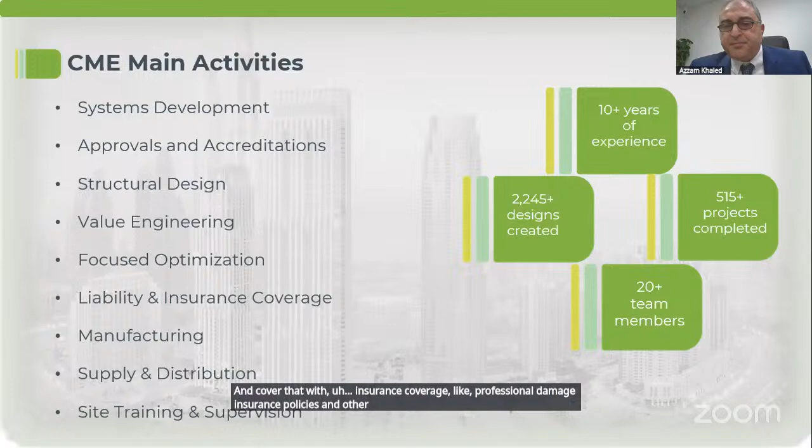Okay, as I mentioned, the main services would include either supply of materials. Let's stick with this slide. So these are the main products or systems that we are doing now.

EVOS, the voided slabs, and the voided slab technology is about 30 years old, maybe a little bit more. It started in North Europe about 30 years ago with a system called Bubble Deck, then moved to another company called Cobiax. EVOS is our own system, approved by the International Code Council (ICC) and many local authorities in the region, including local authorities in UAE like Dubai Municipality.

EVOS, like void formers in general, is about creating voids inside the slabs where concrete doesn't work or doesn't help much handling the loads. E-tension is the regular post-tensioning system, as you all know. And E-fill is the voided filling system, and it is about replacing typical or traditional filling materials, volume or solid materials such as lightweight concrete, with voided filling.

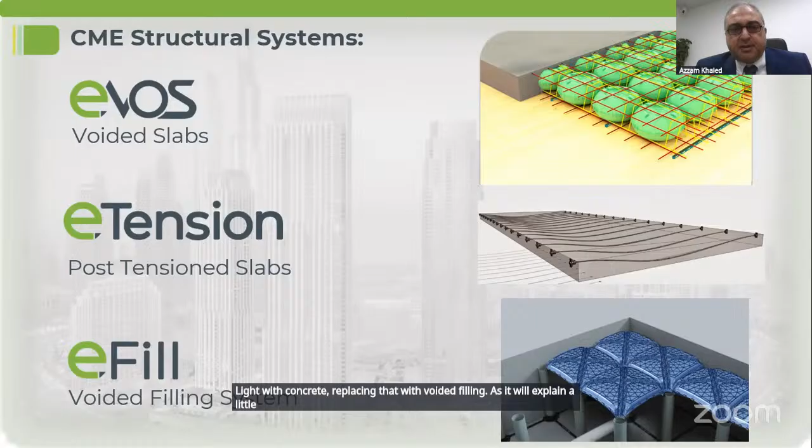So this is the concept of creating voids inside the slabs. As I said, as you all know, between tension and compression, concrete doesn't help much. Under the neutral axis line, it doesn't help much to handle the load. So it's a very old concept taught in universities, about whether it was possible to save this concrete while still keeping the thickness of the slab.

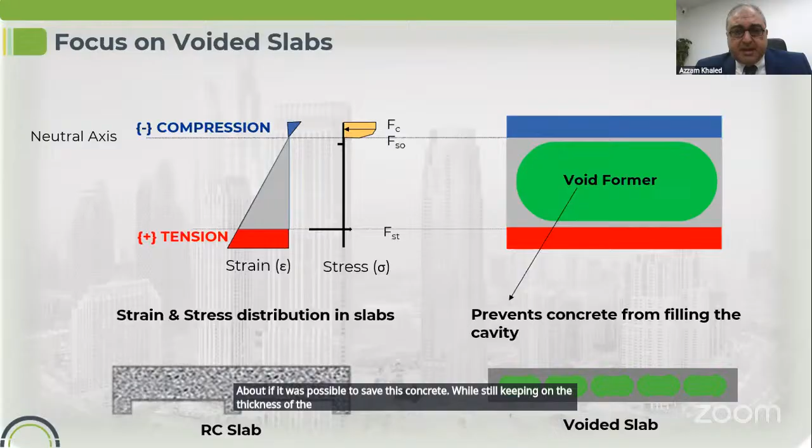Engineer Ahmed will talk a little bit more about this, but as you can see, void creators or void formers are distributed in the slab, avoiding shear areas around columns and edges and openings or stuff like that. In this section, as you can see at the bottom, we have normal steel as in any solid slab, and we have chairs as in any solid flat slab. The only difference is that in some cases in the slab, we have void creators.

These voided slab thicknesses can vary between, let's say, 180 mm to 725 mm. And the covered area could be between 30 to 80% of the total slab area.

It's about, if we say a traditional solution is a solid slab with drop beams or panels, compared with EVOS, the voided slab. In most cases, not less than 90% of cases, slabs would have flat soffits. Almost the same thing with the post-tensioning. With hybrid voided post-tensioning slab, the same thing.

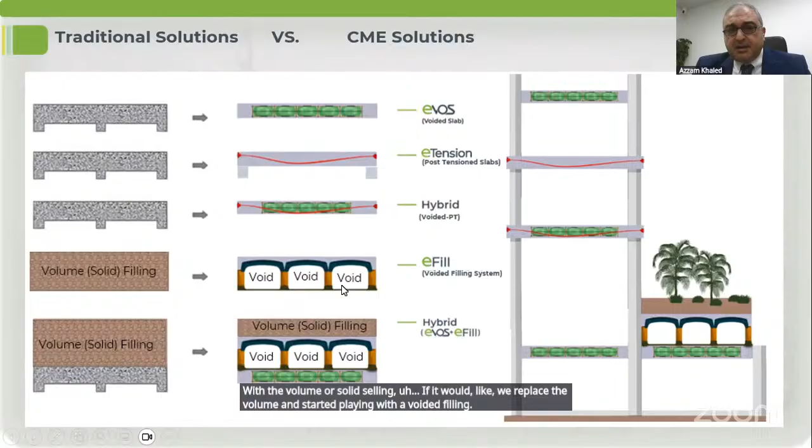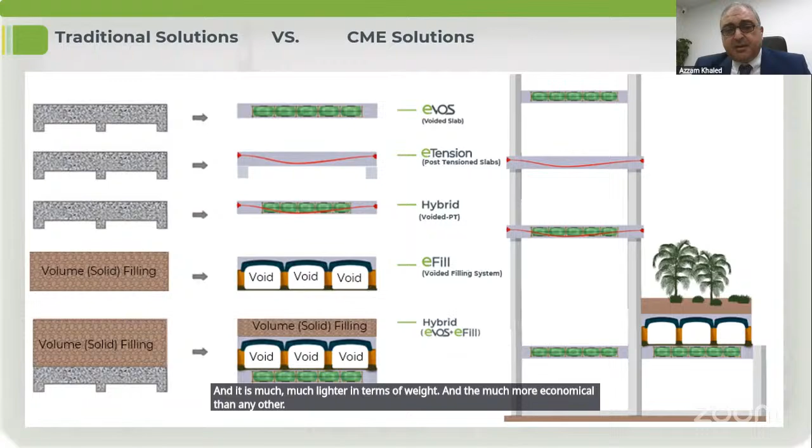And as I explained, with the volume or solid filling, we replace it with a voided filling. Between the columns, the plastic columns or pipes, there is a void, and then these plastic pipes we fill with concrete and steel, so they work as reinforced concrete columns. On top we put again concrete and steel mesh, so it works as the reinforced concrete slab. In general, voided filling structure is like a mini reinforced concrete structure instead of this volume or solid filling, and it is much lighter in terms of weight and much more economical than any other solid or volume filling system, and faster, of course.

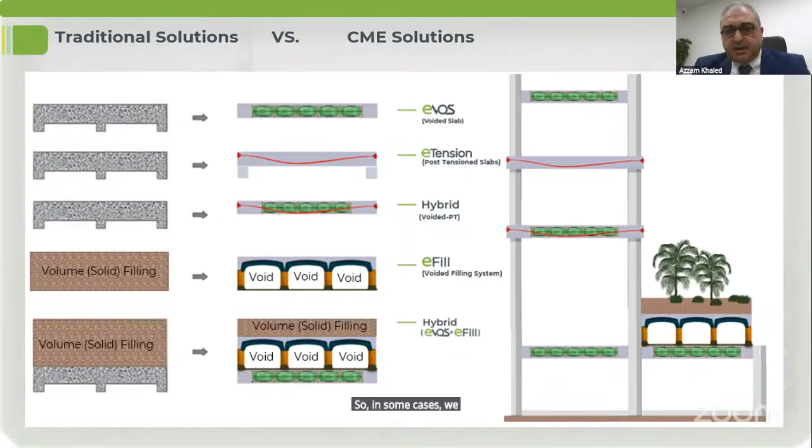So in some cases, we use also hybrid here. Again, Engineer Ahmed will talk about this next.

If we go back to EVOS, to the voided slabs, a small comparison, many people mix between voided slabs and ribbed slabs. In ribbed slabs, we use lightweight bricks or lightweight blocks, or even waffle or polystyrene, or any material, for the same purpose, which is reaching the area where concrete doesn't work, and replacing that concrete with the waffle or lightweight block, making the slab lighter and cheaper.

But unfortunately, with the ribs, when we do that, we sacrifice the bottom cover, like we sacrifice the continuity of the bottom steel and the continuity of the bottom concrete, and thus we create a T-section.

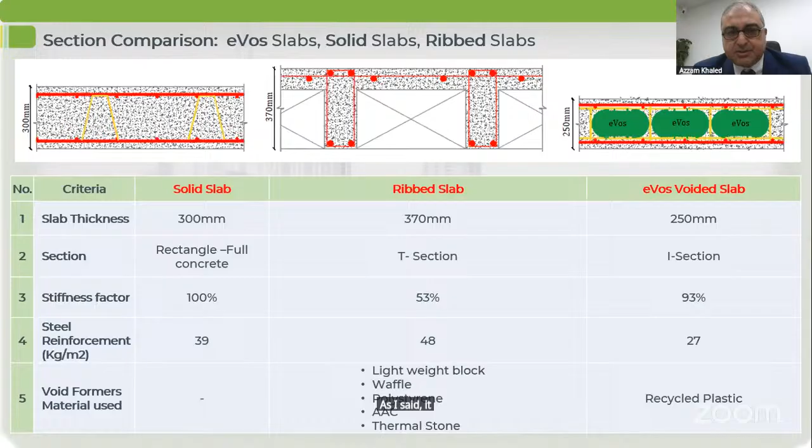And we need, of course, to use lots of steel quantities in the ribs, while in the voided slabs, similar to post-tension slabs, slab thickness goes down to 250, 240, or 260, something like that. And as I said, it does the I-section.

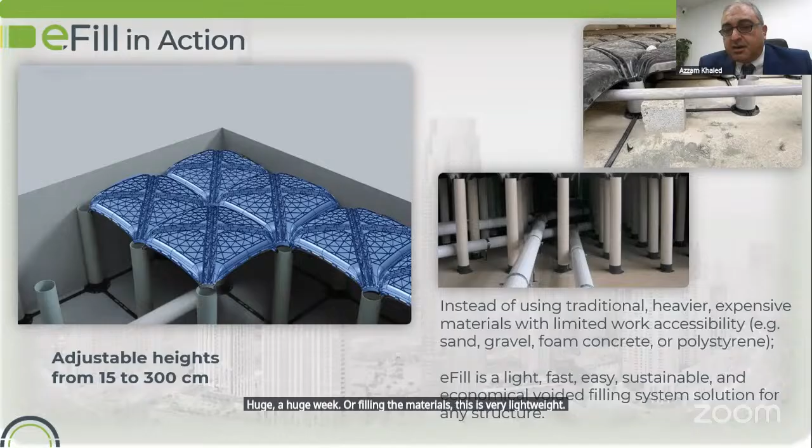This is the structural section of the eFill. The green color shows the plastic elements, which are, I would say, dead shutters—they stay there forever and lose their value immediately after concreting.

The red or brown color shows the steel reinforcement, and how the inverted U-bars go inside the pipe and are hung on the horizontal steel mesh. And of course, as you can see, it is all concreted.

Now, the height of this section or system, with the same system, could be between 15 to 300 centimeters—between 0.15 to 3 meters.

And of course, it's very important to mention that this has to be designed depending on the applied loads and the nature of the applied load, whether static or dynamic, whether we have cars, trucks, or fire engines going on top, or it's just used in landscape or elsewhere.

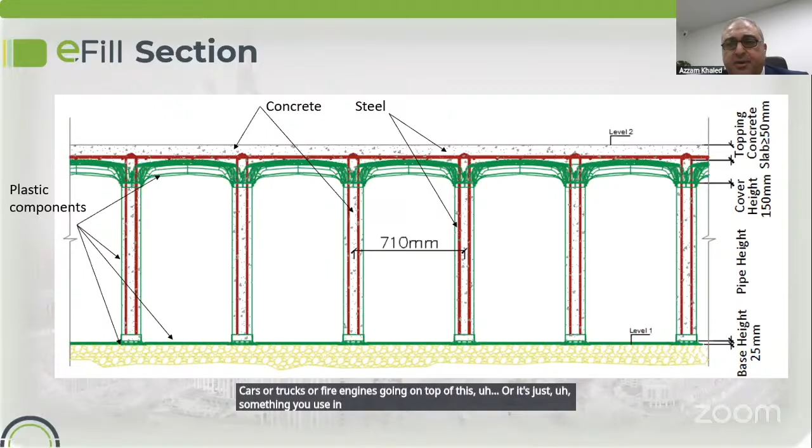As for approvals and accreditations, as I mentioned, for the EVOS we have the ICC, and we have some ACI committee members, Dubai Municipality, and other municipalities, ministries, or organizations in the region in different countries.

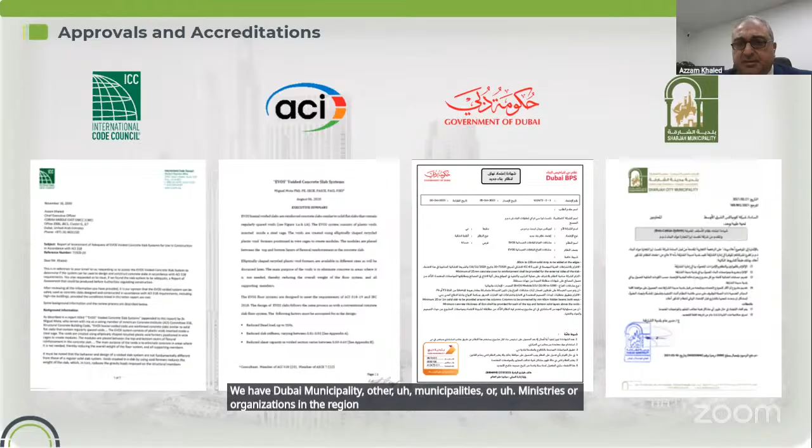With regards to software used in the design, for EVOS we use SAFE and ETABS, and for post-tension we use RAM. So we use the same software, guys, that you all use everywhere in your daily work.

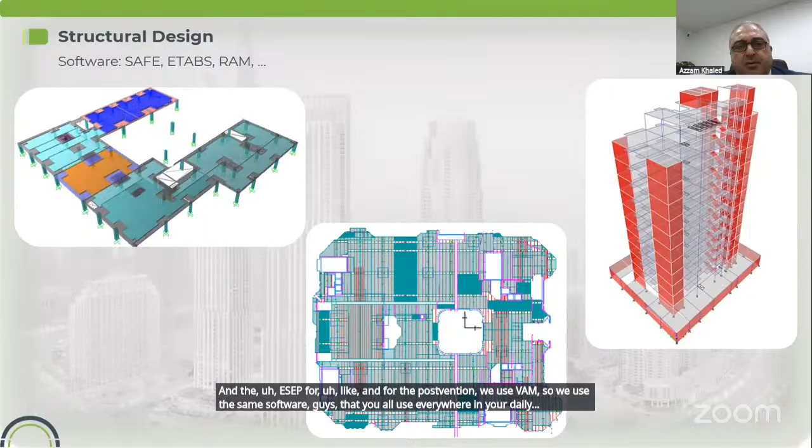With our systems, we usually do value engineering, as I mentioned before, for the slabs, and this affects not only the slabs. When you make slabs thinner, lighter, and flatter, you have lighter loads going onto the vertical elements and fewer reactions on the foundation, all resulting in savings in steel, concrete, labor, shuttering, time, and everything.

And if you translate this to the environment—imagine, for example, with every cubic meter of concrete that we save, we prevent 210 kg of CO2 from going up into the air.

Another issue regarding environment: every truck that we send to the job site carrying materials of EVOS or eFill replaces the need to deliver, on average, 30 concrete trucks. Imagine the effect on transportation or traffic, especially in places like downtown or where traffic is a big issue.

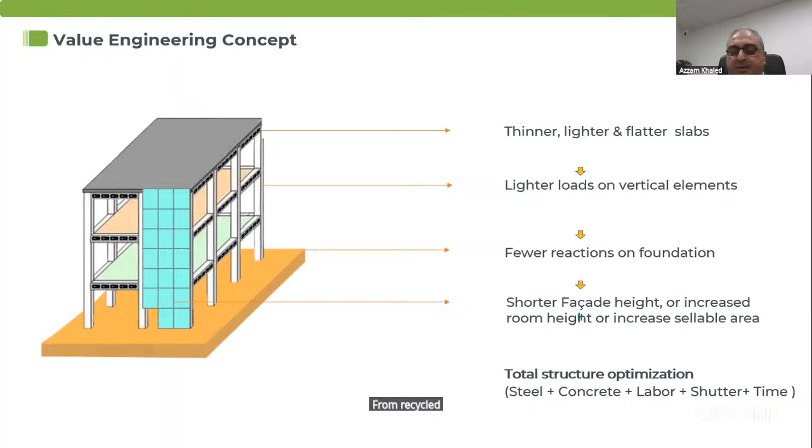Not to mention, of course, that these EVOS and eFill systems we produce locally here in Dubai, and we produce them from recycled plastic—I mean from garbage, we take them from garbage. So they are recycled plastic, and this helps a lot in cleaning the city from plastic waste.

We, as I mentioned before, provide insurance policies to cover the design and also to cover the materials and the systems.

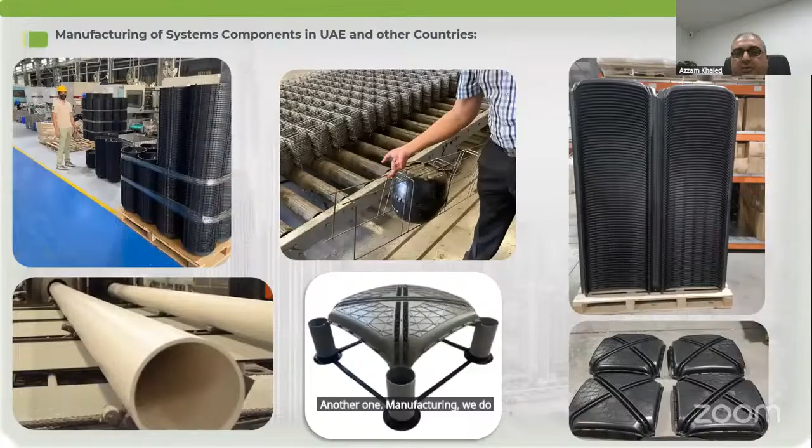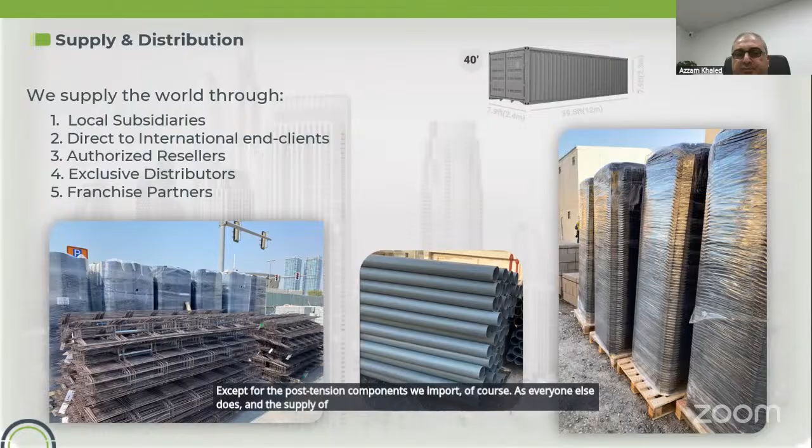Manufacturing—we do manufacturing locally here in Dubai, as I mentioned before, except for the post-tension components which we import, of course, as everyone else does. The supply of materials to job sites comes unassembled.

These are some, we also do training and supervision at the job site for the contractor team.

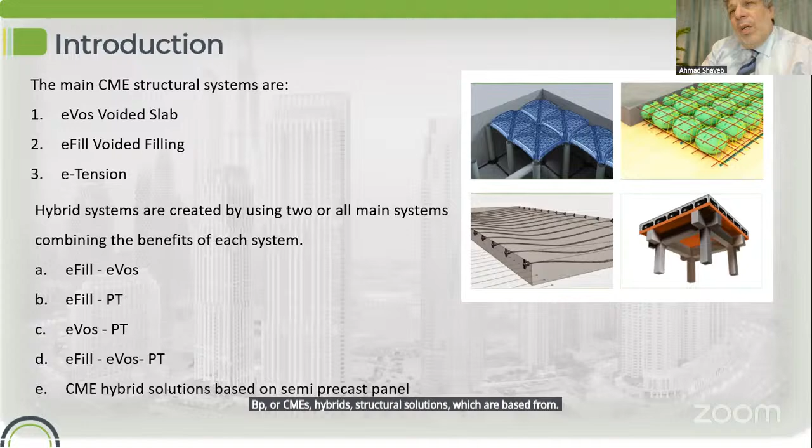Now, the EVOS, as an engineering concept, as Mr. Azam has already told, we are targeting the area of the concrete or the volume of the concrete inside the slab which is not acting in the resistance of the section. So whatever concrete is below the neutral axis, this concrete is not working because it is in tension.

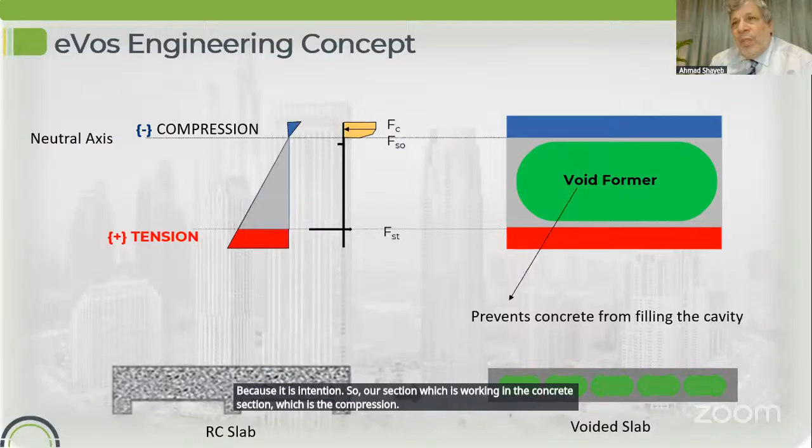So our section, which is working, is the concrete section in the compression part of the void of the slab. So we can remove the concrete from the middle, keeping the bottom layer, which will help us in getting the I section instead of the T section, and also in placing the bottom mesh, which will help a lot in reducing the reinforcement ratio.

The voided slabs will have about 30 to 80% of the area filled with the voids, keeping in mind that the area around the supports is kept all solid because these areas suffer punching shear, which is high there. So we'll keep it as full concrete thickness.

The interface between the solid part and the voided area around the column is defined also by the one-way shear. So wherever we calculate the one-way shear at the perimeter of the column, in order to define where we can stop putting voids inside the slab. Also around the edges of the slab, and around openings, we keep it free of voids.

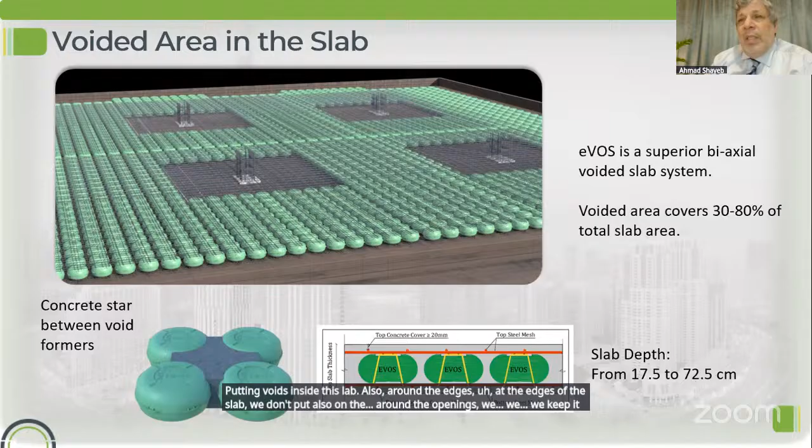At the end, we will get a section for the EVOS system which will have a bottom mesh, the red color in the bottom, and a top mesh, the red mesh on top. The voids in between are kept in something we call a steel cage, which is the yellow. This steel cage helps a lot in keeping the voids fixed at the proper location, and also helps as a shear connector if we have some cold joint during the construction process.

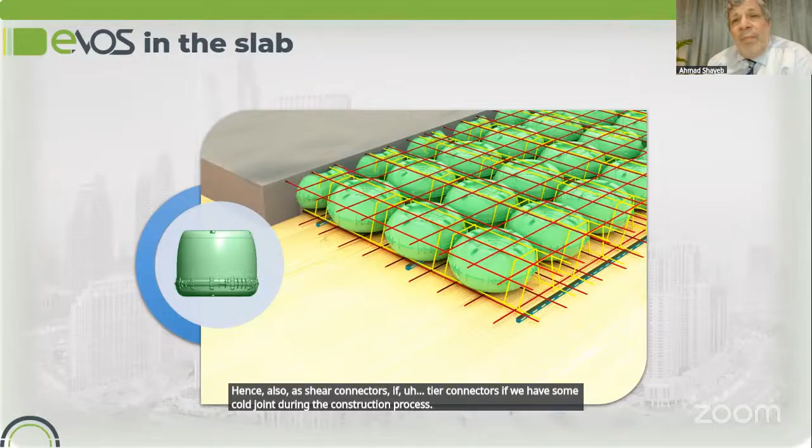Design of the EVOS slabs can be done by any standard or code like ACI or Eurocode. Of course, we have also got the ICC and ACI accreditation, which concludes that the EVOS voided concrete slab system can be used to design and construct concrete slabs in accordance with the ACI 318 requirements. All slab design requirements of ACI 318 are complied with.

EVOS slabs are designed as solid slabs according to ACI 318 or any other code, using SAFE, ETABS, or any other finite element software, after considering three factors. The voids in the slab affect the slab in three main points: it reduces the volume of the concrete, meaning it reduces the self-weight of the slab, so we have a reduction in the dead load.

It reduces the shear resistance. For that, as we said, we keep full concrete around the columns. There will be a factor used in the design, which is, let's say conservatively, 0.5.

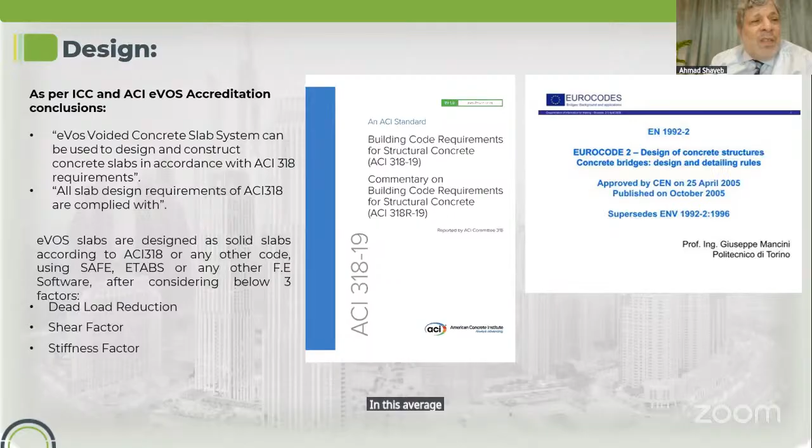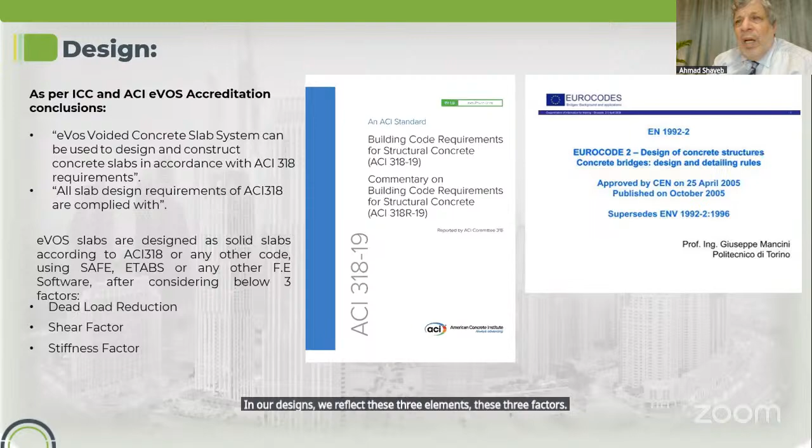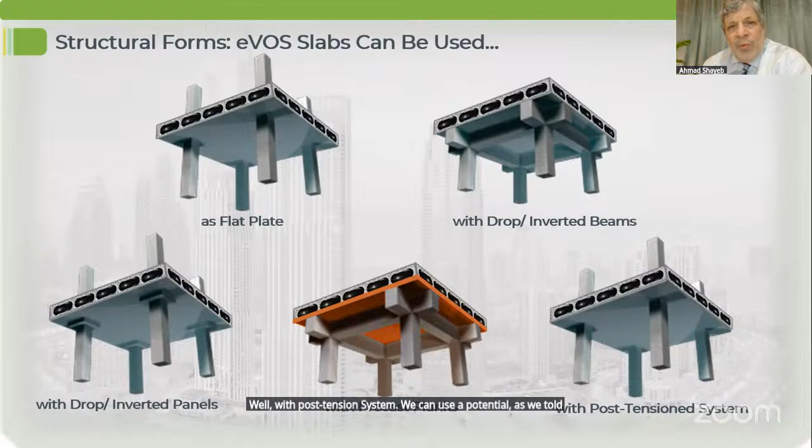In our designs, we reflect these three factors in the software we are using. Of course, the structural forms of EVOS slabs can be flat slab, flat plate, with drop panels or drop beams or inverted beams, with precast elements or with a post-tension system. We can use post-tension, as we said, as a hybrid system, which is a post-tension voided slab, EVOS slab.

As a combination of eFill filling, voided filling, and EVOS slab, we can get a hybrid system in which we can replace the soil filling. If we have soil filling on top of a slab, we can replace part of the soil filling by the eFill system, which will reduce the imposed soil load on the slab. We can also reduce the self-weight of the slab by using the EVOS slab system.

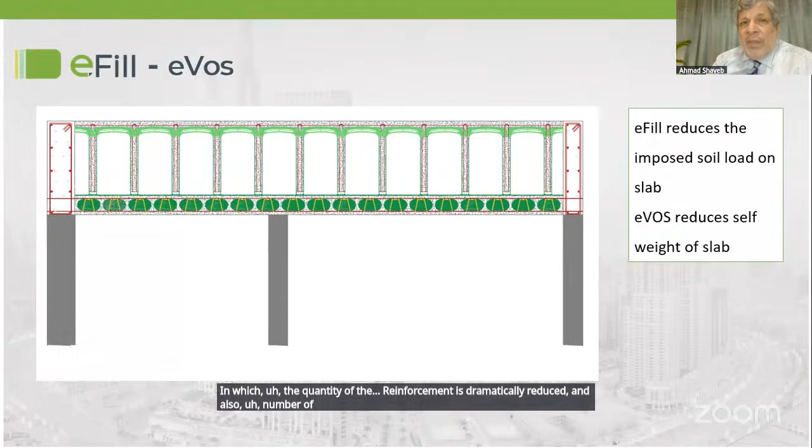This combination helps a lot in ground floor slabs or podium slabs that have landscaping, where the quantity of reinforcement is dramatically reduced, and the number of drop panels is also minimized a lot.

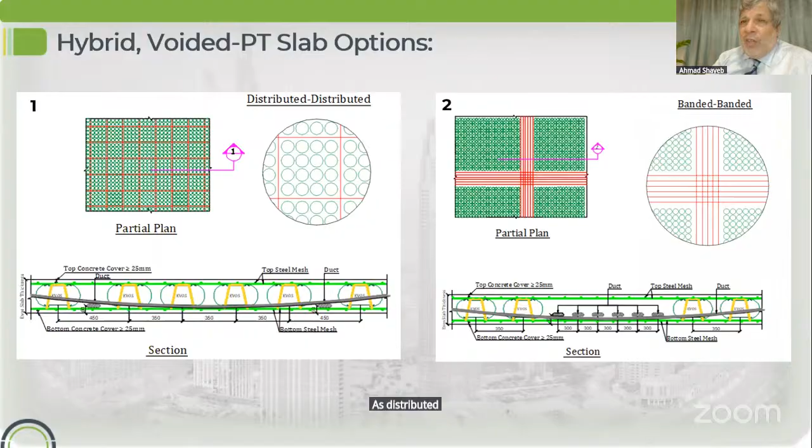For the hybrid voided PT slabs, we have the options normally used in post-tension: we can use the post-tension distributed in both directions, banded in both directions, or banded-distributed in each direction, or we can use a voided EVOS slab with PT beams.

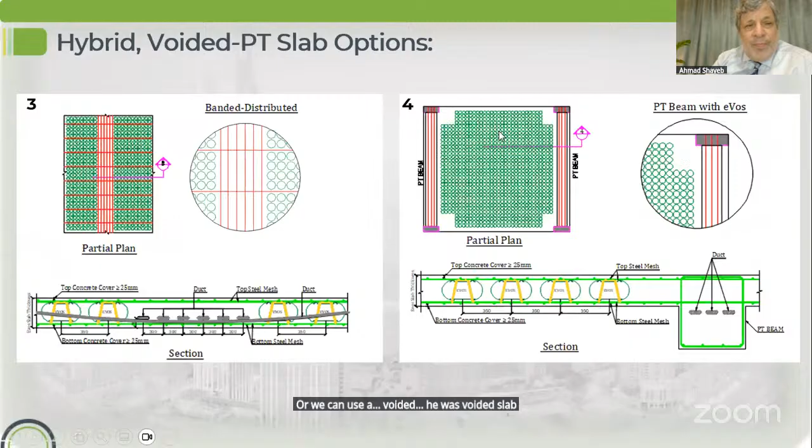Now, why are we developing the hybrid system? Because the hybrid system, which is the voided post-tension slab, combines the benefits of both systems: the EVOS voided slab system and the post-tension system.

The EVOS slabs reduce the self-weight. The post-tension slabs also reduce the thickness and help a lot in controlling deflection and crack widths in the slab. Combining these two systems together, we can reach ultra-long spans, providing greater flexibility in the layout design.

In architectural layout, it's about flexibility. The reduced quantity of concrete is also a very good reduction. We are getting thinner, lightweight slabs to optimize the structure and the foundation. There's superior crack and deflection control by using the post-tension system, and enhanced sustainability.

There's a significant reduction in total steel reinforcement, and superior optimization in vertical elements, foundations, and construction material. And of course, cost savings—we save in the slabs, and for sure in the verticals. A lighter, thinner slab reduces the reactions on the foundation and vertical elements, which reduces the sections, saving concrete and reinforcement.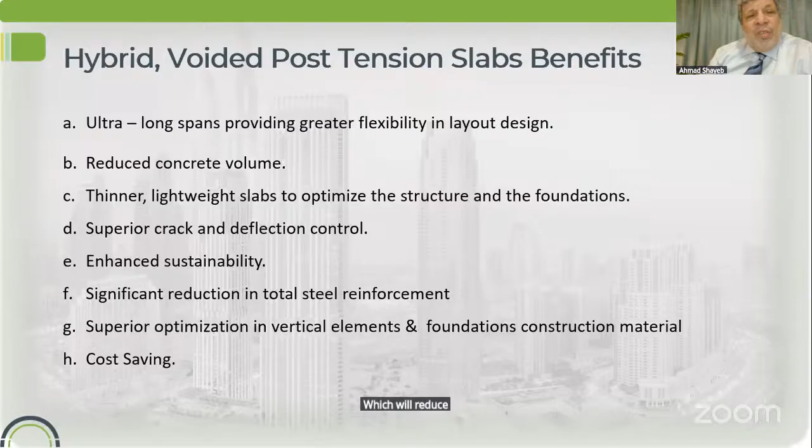As an approximate comparison between an RC slab of 300 millimeters thick with our post-tension system, EVOS system, or the voided PT hybrid system: for the 300mm RC slab, it's around 260 millimeters for the post-tension, 260 millimeters also for the EVOS voided slab, and around 240 millimeters for the voided PT slab, which is the hybrid system.

The reduction in concrete volume will be around 15% in the post-tension, 30% in the EVOS, and around 35% in the EVOS PT.

For steel reinforcement, we also have a reduction: 30% in post-tension, around 15% in EVOS, while in voided PT we'll get around 35%.

For the drop panels, around 70% of drop panels compared to RC are removed by the post-tension system, around 90% in the EVOS voided slab system, and around 95% by the voided PT slab system.

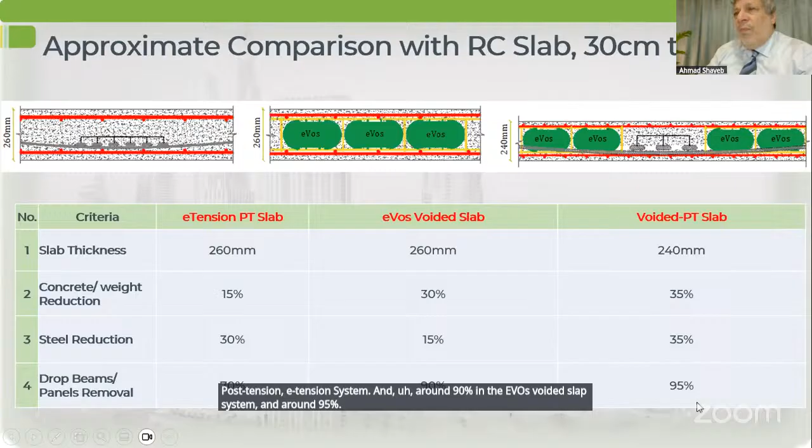As we told earlier, we can also use our systems based on precast or semi-precast elements, in which we put the void formers on top of these precast elements, which helps a lot in the shuttering system. It acts as a dead shutter also. So we can combine these two to get a great system that helps in big areas which need to reduce the quantity of shuttering—wood shutter, aluminum shutter, or any other shuttering system.

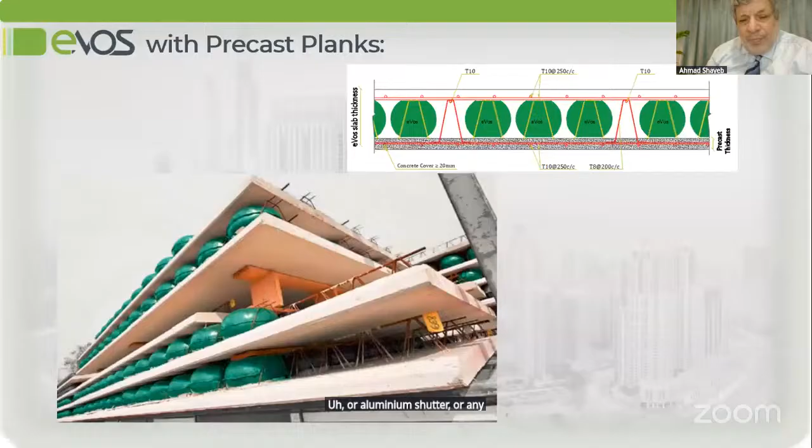As an example, we are showing here a plan that we have for the voided slab. The green colors are the void formers. The white colors are the areas with no voids—either solid or a solid area. And if we have a drop panel, it's marked with a square or rectangle around the support.

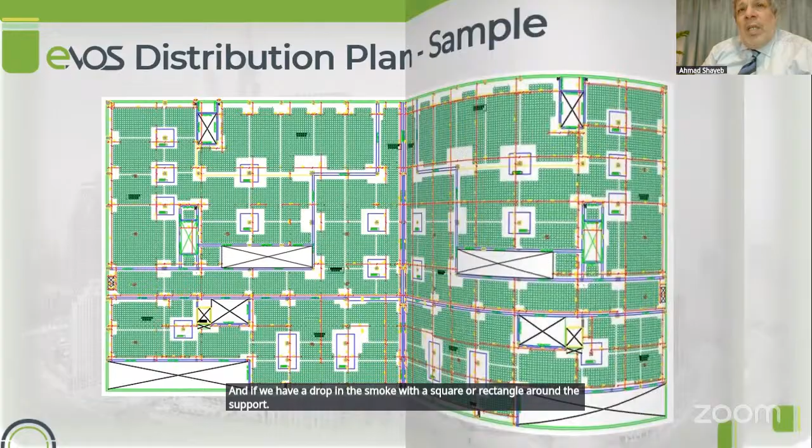Now, in between the columns or supports, we always keep a solid part which connects these columns and supports together, without the presence of any void in this collector or line of connection between the supports.

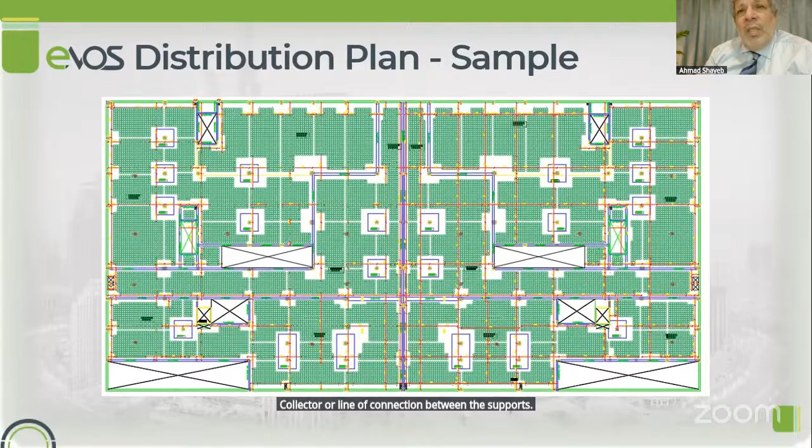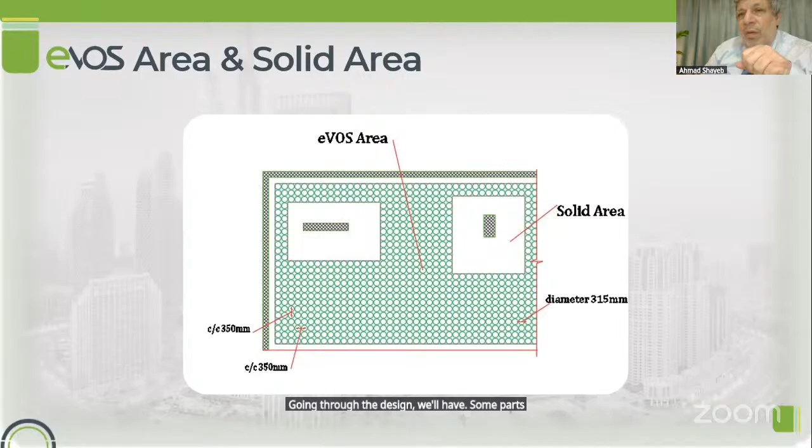Going through the design, we'll have some parts which are voided areas and some parts which have solid areas. The spacing between the void formers, center to center, is 350 millimeter. We keep around 600 to 800 millimeter around the slab edge. Around the column, we keep minimum 1 meter, or as per the design, based on the one-way shear.

This will be reflected in our modeling. For the slabs, if it is EVOS alone, we use the SAFE. If it is EVOS PT or PT, we use the RAM concept. These areas will be defined in this modeling process.

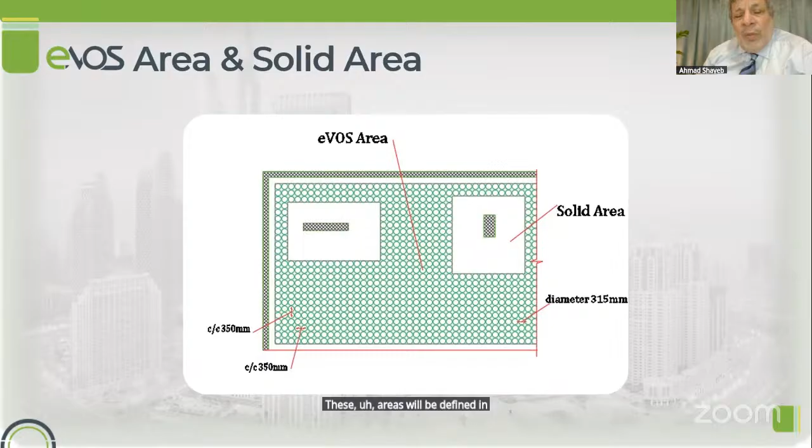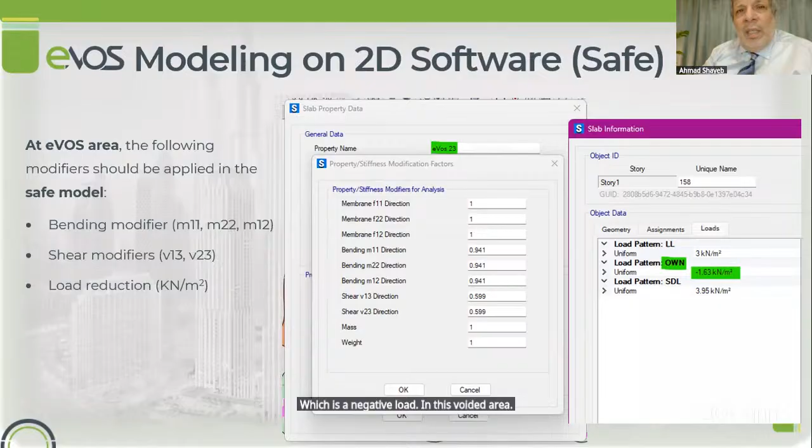And in the V13, V23, we will put the reduction factor of the shear factor. While we will go to a case, which is the dead load case, and we'll define a reduction in weight, in load, which is a negative load in this voided area only. The other areas which are not voided will be kept as normal, the factors are kept all as 1, and there is no reduction in the slab weight.

Now, these factors, which we will define in the M11 or the membrane or the shear, or the reduction in weight, are based on our schedule in which we have these factors for each thickness and for each void former, because it depends on the void former height and the slab thickness.

Of course, we will also work on ETABS in order to get the lateral stability and thermal, whatever lateral loads. So modeling the EVO slabs in ETABS will be the same also. We will define the stiffness reduction factors in the bending modifiers, and the shear modifiers, we will put also these reduction factors. We can put at the 0.5 as a conservative value.

Of course, in the bending, depending upon the type of the slab, if it is RC slab, normally we use 0.25 as a factor in the solid RC slab. So in the membrane and the bending, we will multiply the stiffness factor by the 0.25 and define it in the ETABS model.

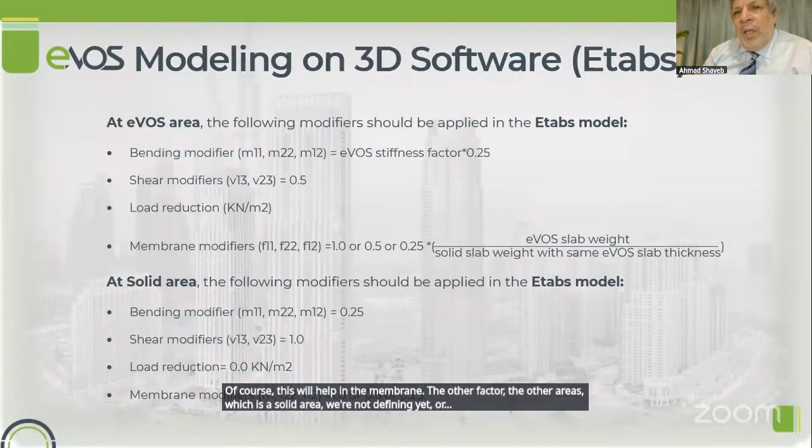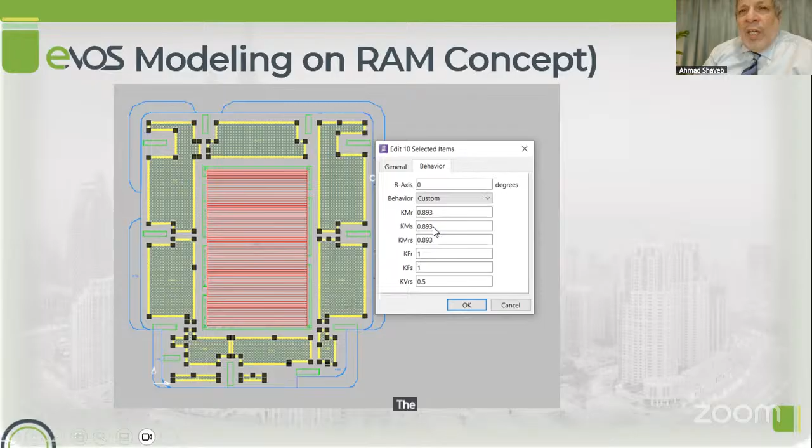Of course, EVOS slabs are not treated other than the RC slab in the diaphragm issue. These void formers which are inside will reduce a little bit the collaboration of the slab in the horizontal transfer of the load, but we are keeping the connection between the columns also, which will help in this issue, and keeping these collectors or solid will translate the horizontal load by the diaphragm action.

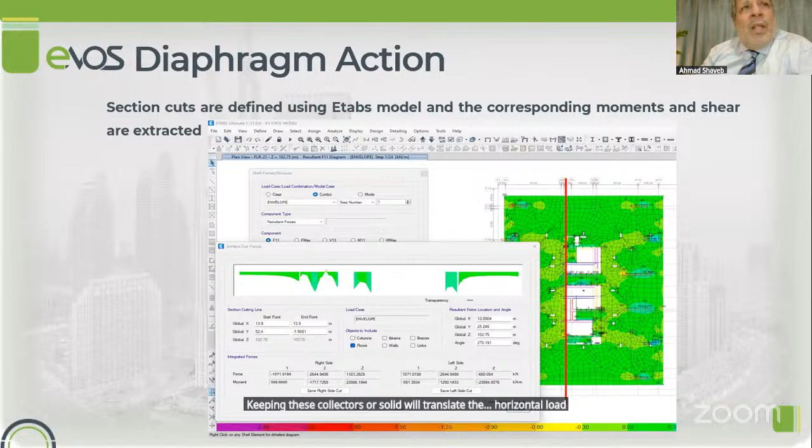In the diaphragm, of course, we will use the ETABS. We can take section cuts at the required sections, and we will get the moment and shear and design the sections based on these straining actions. Of course, when we are designing an EVOS section...

By manual calculations, we always ensure that the neutral axis is lying within the top flange or the topping slab.

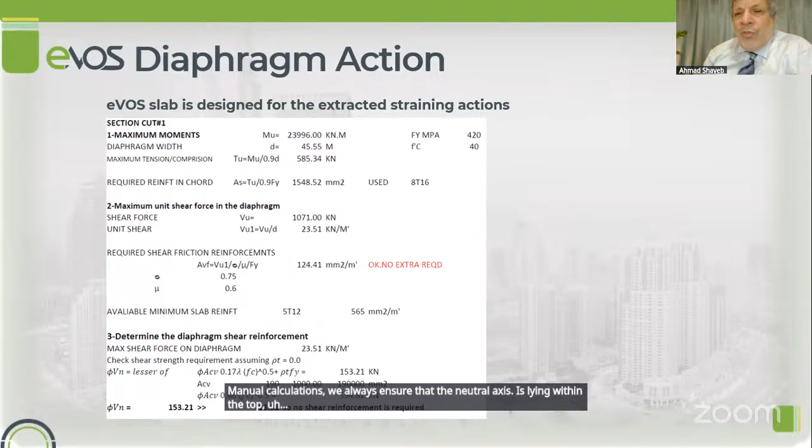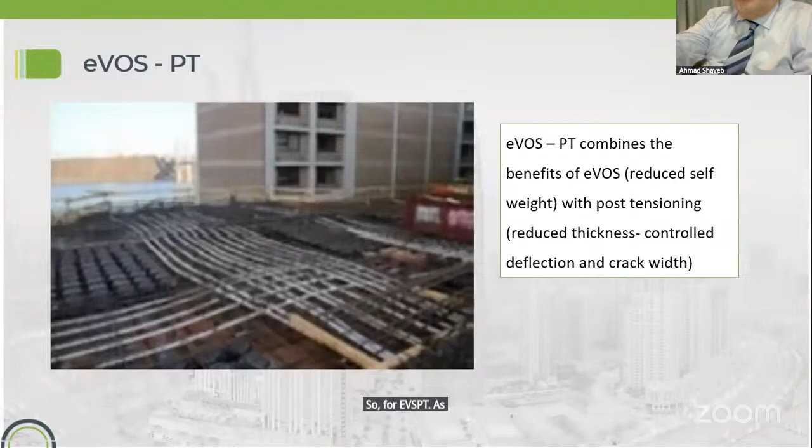So for EVOS PT, as we told, it combines the benefits of both. So we'll have voided area with PT tendons around it. This is also a voided slab with PT beams. So we'll have post tension and voided areas.

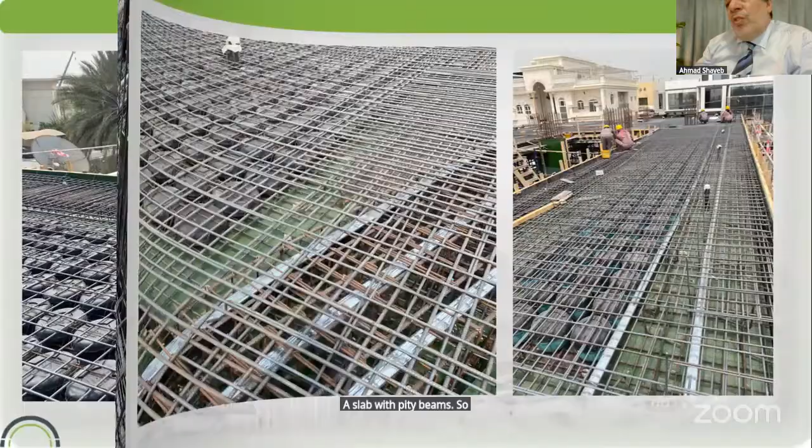also as photos for them.

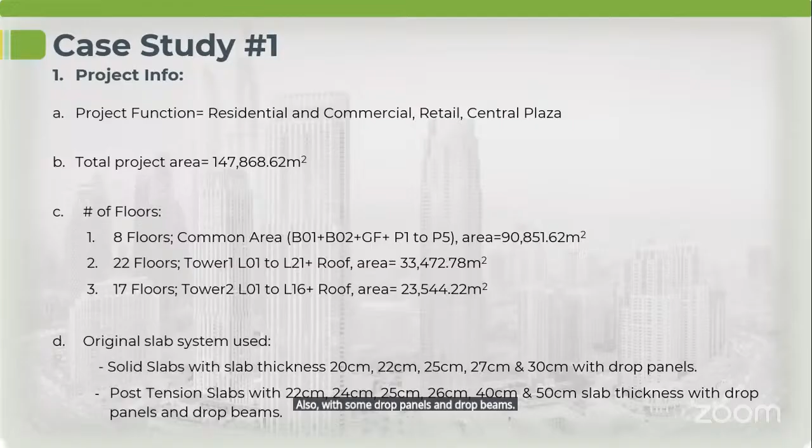The target of this client was to optimize the structure in order to reduce the construction activities and to get savings in the cost of the project.

So in our value engineering, we managed to reduce the drop panels. In the basement or substructure, we removed totally the drop beams and drop panels. In the upper floors, we reduced the number of used drop beams. This eliminating of drop panels leads to decrease the construction time. So we save in the shuttering and steel work of these drop panels because we eliminate some of these drop panels and drop beams.

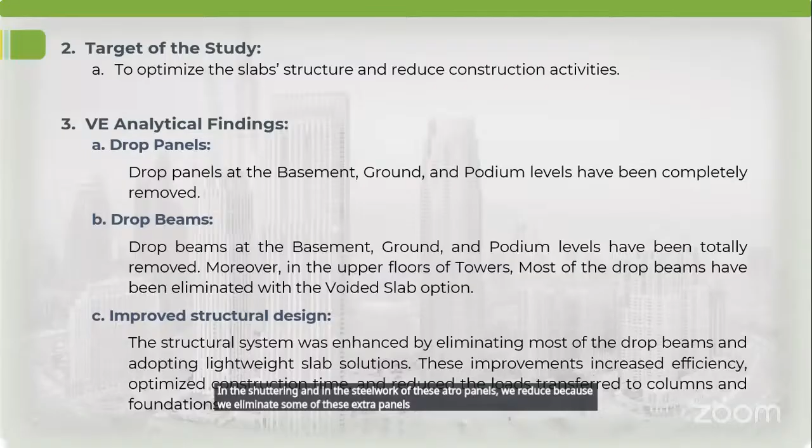Here we will talk about the value engineering results for the common area, which is the basement and the podiums.

Here we studied a voided slab, EVOS, and compared it with the original design. In the basement slabs, B1, B2, and the ground, the original design had solid slabs with 25 and 30 centimeter thicknesses. We managed to reduce the slab thickness by using EVOS voided slab, reducing it to 23 instead of 25, and 25 instead of 30 centimeters.

In the original design we don't have drop beams, but we did have drop panels, which we removed entirely in this option. Accordingly, we reduced the slab weight by 32.6% comparing with the original solid slab, and we removed all the drop panels.

The steel reinforcement was also reduced, by 39.1%. This is the total steel, meaning the gravity, thermal, and lateral steel, in the substructure and in the superstructure, which is the podium.

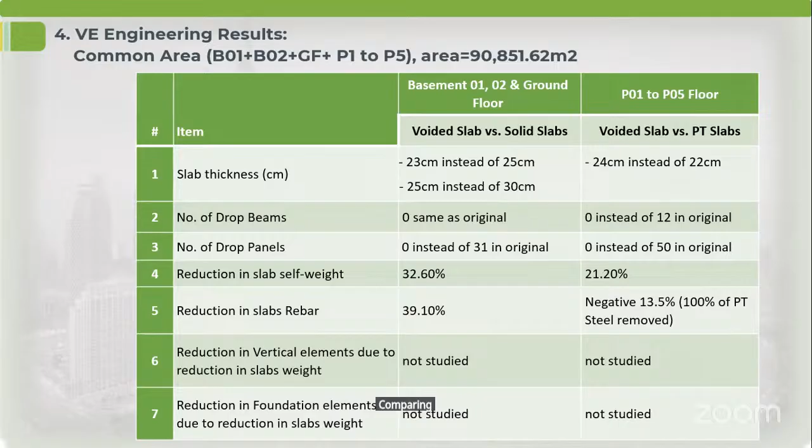Here are the results for Tower 1. In Tower 1, we studied a typical slab in 3 options: option 1, EVOS voided slab compared with PT slab; option 2, E-tension PT slab versus original PT slab; and option 3, hybrid voided PT slab versus PT slab.

In option 1, we managed to reduce slab thickness from 2 to 5 centimeters comparing with the original PT, and we eliminated some of the drop beams, using 3 instead of 11 as in the original design, while keeping the same drop panels as in the original design. Accordingly, we reduced the slab weight by 19.9% comparing with the original PT.

Comparing to the normal steel, our steel is 17% more than the normal steel in the PT slab, while we remove 100% of the PT steel.

Option number 2, which is E-tension post-tension, comparing with the original post-tension, we reduce the slab thickness to 22 centimeters instead of 25. In some areas of the studied slab we keep the same thickness of 25, and in other areas we reduce 3 centimeters, 25 instead of 28. Also we reduce the number of drop beams, using 3 instead of 11, and we use 14 drop panels instead of 13.

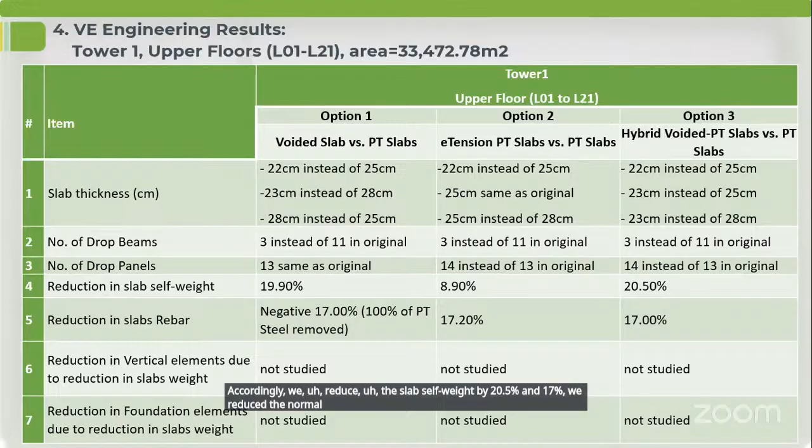If I would add to what you have said, with the hybrid slab, with PT we reduce lots of steel reinforcement. With EVOS or with voided slabs, we reduce lots of concrete. With hybrid slabs, we reduce both - the reduction in both is maximized.

Now, it is worth saying that hybrid slabs are not suitable everywhere. In about maybe less than 20% of cases, hybrid slabs are powerful, but in the remaining slabs it would be either EVOS alone or post-tension alone.

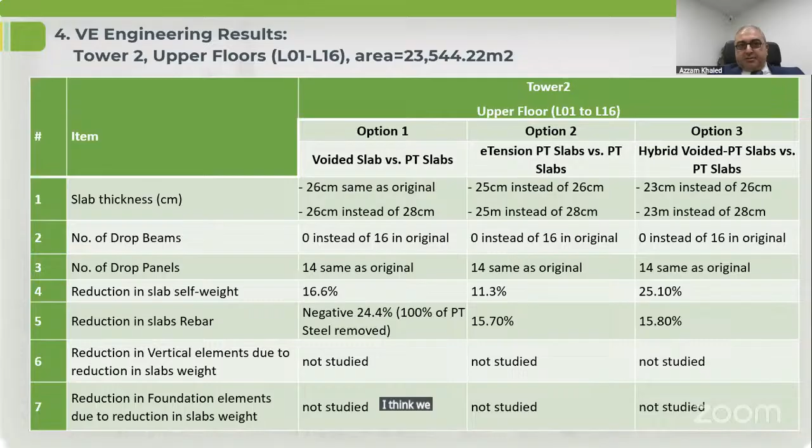Okay, can you rush a little, Rasha, because I think we're short on time. Okay, please go ahead.

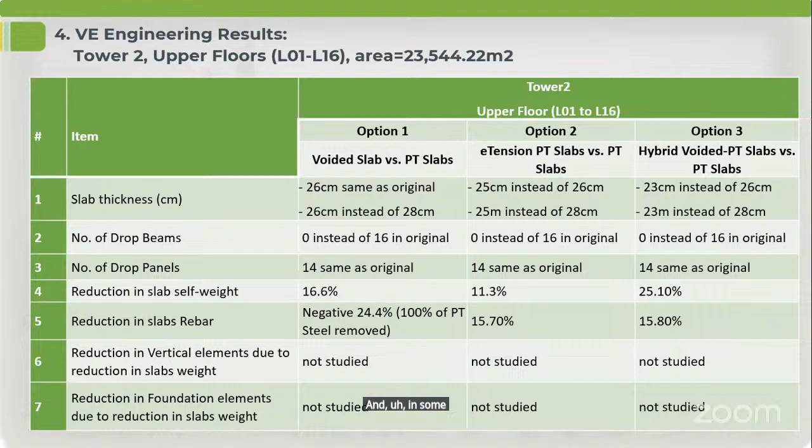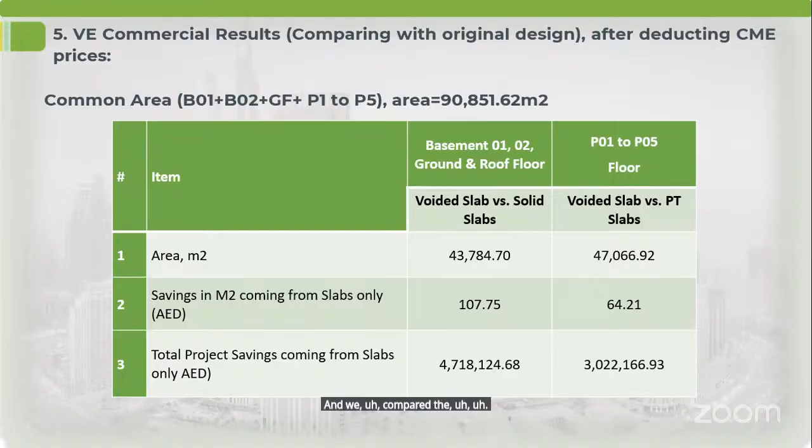So in Tower 2, the same way we studied the 3 options, and we reduced the weight and in some cases the steel reinforcement. We reflect these engineering results as a commercial result, and we compare commercially what we can achieve for this project as a total. For the total project - the podium, basement, Tower 1, Tower 2 - comparing the original slabs designed with our slabs, this project saves around 11 million dirham as a total only from the slabs, if we compare slab to slab only, without considering the reduction in weight in the vertical elements or in the foundation. So we achieve what our client needed from us.

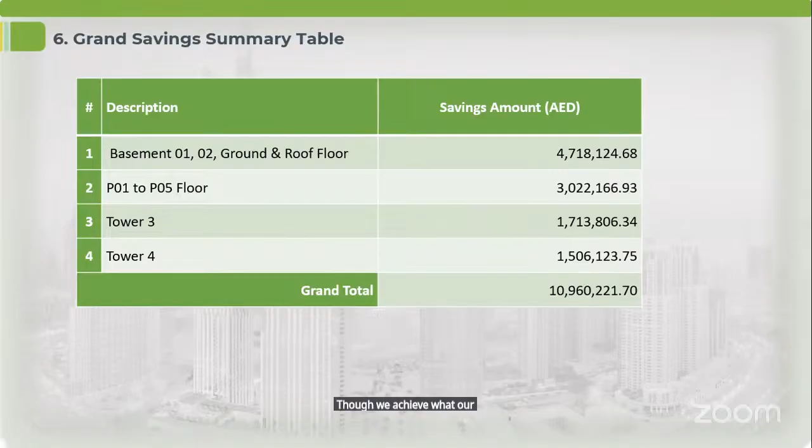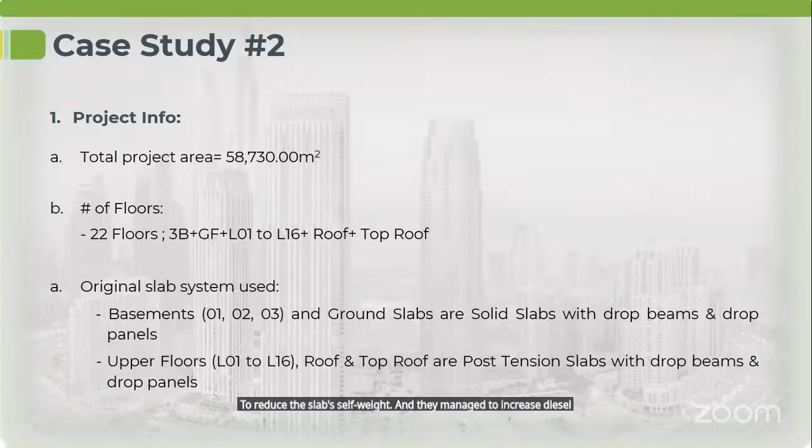In the second case study, the target of the client in this project is different. They have already cast the piles and the raft foundation, based on a design of 22 floors. The client managed to increase the floors by an additional 4 floors with the same piles and same foundation. So in order to do this, they approached us to help reduce the slab self-weight and manage to increase these four floors. So what we decided to do is use our slab systems, different slab systems.

At the end we found that the EVOS voided slab in this case is the better solution to reduce the own weight of the slab, and then the total weight of the slabs will be reduced. So we convert all the solid slabs and the post-tension slabs to EVOS voided slabs.

Also, in this project they have a cantilever area with a swimming pool. Around this swimming pool, they use traditional filling material. So we managed to remove or replace this traditional filling material with the EFL system, reducing the superimposed load on the suspended slab. So this is the second solution we used.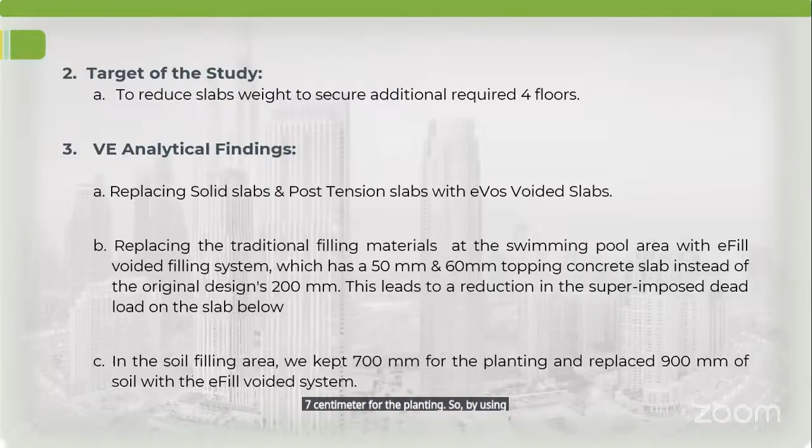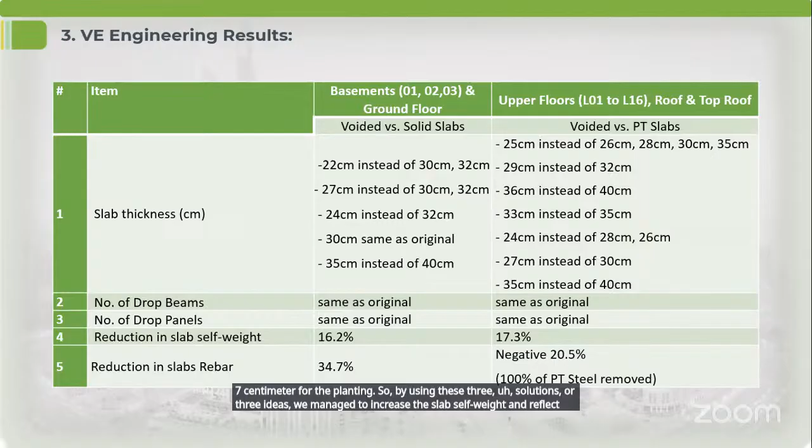So by using these 3 solutions or ideas, we managed to reduce the slab self-weight and reflect this reduction in the slab weight to the vertical elements and foundation. And we guarantee to our client that they can add 4 floors to the existing piles and existing foundation without any strengthening or need for strengthening.

In addition to money saving - yes, absolutely, they have around 3 million in savings from slabs, on the slab to slab comparison.

By the way, your camera is off, Rasha. Okay. Yes, thank you. You finished? Yes, I finished.

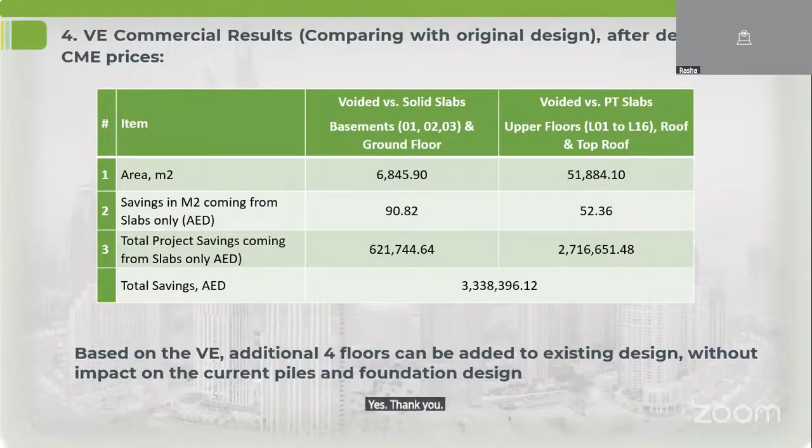Okay, good. Guys, I think it's Iman, you have the floor now. Yeah, thank you very much for this very insightful presentation. The case studies, I think, were very enlightening to show the comparison.

Thank you for that. So we've got a few questions coming in. I'll start with the Zoom chat. A question from Hardeep Sharma: does making voids make the slab prone to punching? If yes, do we provide a solid section there, or is there any other criteria to cater for voids?

So by voids, I believe it's referring to penetrations. As we mentioned in the presentation, around the columns we don't put any void formers, keeping the full thickness of the concrete acting to resist the punching shear.

If there is a concentrated load or anything like this, do you do the same? Yes. If there's a planted column, let's say, or any concentrated load below this area, we don't put any void form. Great, thank you.

Second question from R. Vurugonda. Can the voided slab be used as a cantilever like balconies or other location? Yes, we can. Is there a limitation for how far we can go, or does it depend on the depth and load? Yes, it depends on the slab layout and the applied load. So yes is the answer. Thank you for your question.

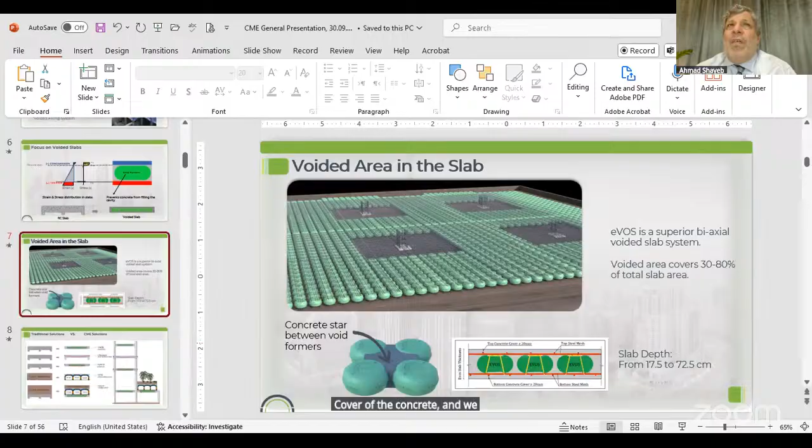Now, the fire resistance depends on the slab thickness and the concrete cover to the reinforcement. As the section of the EVOS shows, the void former is fully encased inside the concrete with a minimum topping or bottom concrete thickness of about 50 millimeters. This is the minimum, so we consider the fire rating based on the cover of the concrete, and we follow the codes for the concrete cover around or on top of the bars.

Now for the void former, in case fire happens, the void former is nil—it's not a structural element, and it doesn't chemically react with the concrete. It only melts if fire happens, which will not affect the slab integrity. Of course, the fire will affect the slab integrity overall, but not because of the void former itself melting or suffering from fire around it.

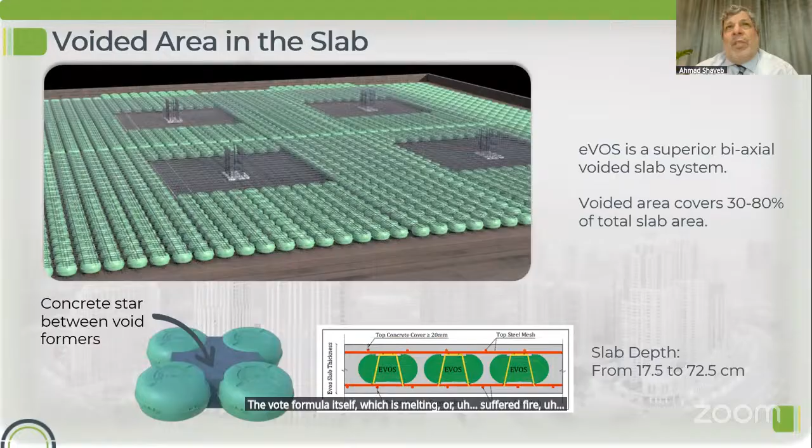Thank you very much. What is the cover that we need to take care of? Yes, the cover under the reinforcement is what we need to take care of. As per, like in Dubai for example, as you all know, it is usually 25mm used, and that secures more than 2 hours fire rating. If someone needs more, of course this has to be increased as much as it is allowed by the code.

Yes, thank you very much. We have a question from YouTube with a few folds, I'll take it one by one, from Shapoor Merkar: nice presentation, what is the cost of the redesign, is the first question—I think, considering a traditional form is there and we're switching to the voided slab. The answer is, share with us and we will look at it and advise.

Sure, how many projects has your system been used in already, any indication? I think we exceeded 500 now, and not only in UAE, but in the UAE and neighboring countries.

Thank you. Is there any extra time required in placing the void former? And maybe this question also comes with specialist skills—how do you train the contractors on site, how do you need your team to be present, how does the practice happen? So that's a practical and perfect question, actually.